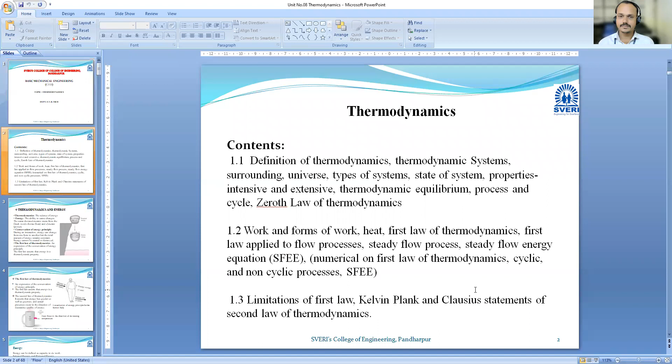This one is the syllabus, and that ability to change, to make some changes, means to run a vehicle, it needs to change energy from chemical energy - that is petrol, diesel - to mechanical energy, and that mechanical energy runs the vehicle.

So one more definition you have told, what is that? Capacity to do work, like that. Am I correct? Yes, sir, capacity to do work. So you can say to do some work, it requires some energy. Always, without energy, there should not be work.

Okay, so we are proceeding in that respect. So heat and work, these are very important phenomena, and many times students are more confused in that. So what is meant by heat? Mostly students are mainly confused, or they are considering heat and temperature both are same.

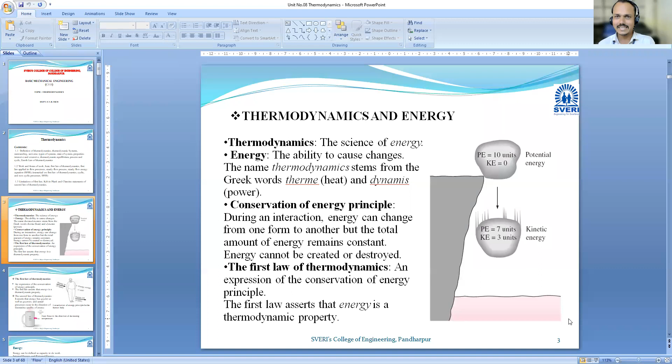Okay, so what is your opinion? At first I have told - yeah, Sally told that heat and temperature both are different. Okay, so we will see next whether they are different, whether they are same.

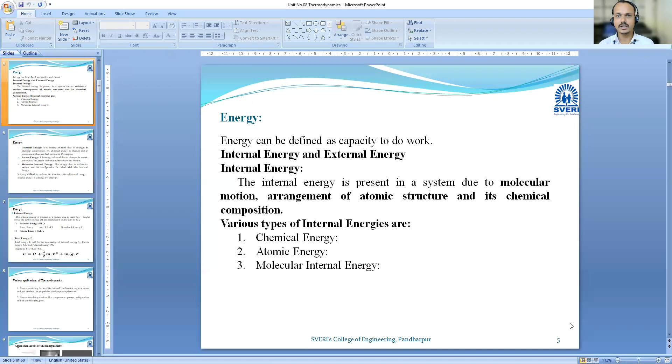Now we have seen there are two types of energies. First one is the internal energy. The internal energy is due to the molecular motion, arrangement of atomic structure, and its chemical composition. Okay, so this is the internal energy.

Now we are going to see external energy. Which are those external energies? Potential energy and kinetic energy. These external energies are mainly related to work. Do you get it? The external energies are mainly related to work.

Work - what is meant by work? Suppose this is the block, simple diagram, but ground is not straight, so I have to draw ground straight. Okay, on that if I put some block. So when I apply force here, that is F. Here we have mass M. So what will happen?

When I apply force, this block will be displaced in the direction of the force. That means work is done. Okay, that force is due to some energy.

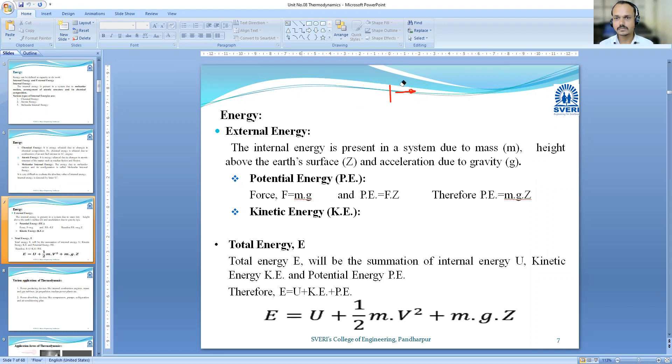So this external energy, that is potential energy and kinetic energy, are mainly related to work.

Then, various applications of thermodynamics. Thermodynamics is a very large area, covering a very large area. So these are some examples: internal combustion engines, steam and gas turbines, jet propulsion, nuclear power plants, etc. Power absorbing devices like compressors, pumps, refrigeration, and air conditioning plants. These are not the only examples.

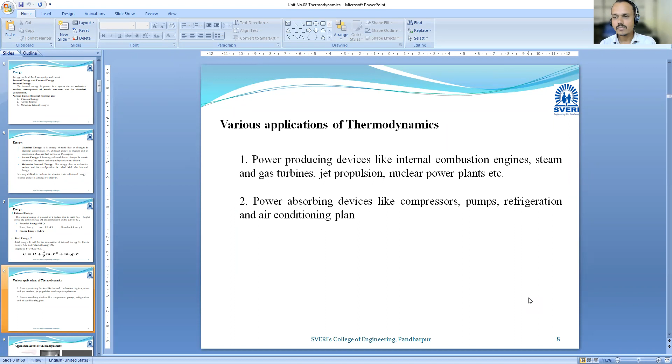Okay, if you are boiling water, this also comes under thermodynamics. If you are going to boil tea, making tea, then it also comes under thermodynamics. So thermodynamics is related to our day-to-day life. These are examples or applications of thermodynamics, but we can observe all these changes in our day-to-day life also.

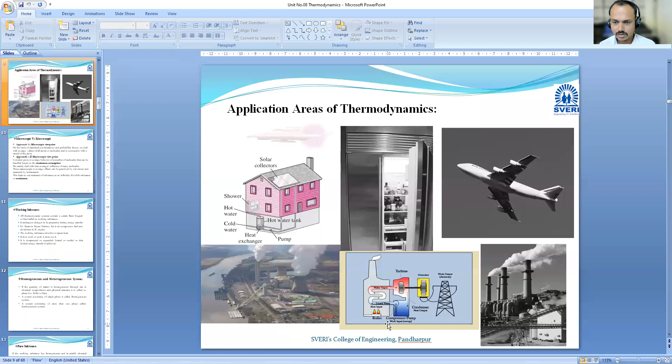Okay, so these are some images for these applications. Here, this is a solar power plant, hot water tank, then this is refrigeration, our fridge, this one is an aeroplane, these are industrial areas or nuclear power plants. Then again, this is also a compressor, and boilers are used in industry.

Now, microscopic versus macroscopic. There are two types of studies. One is microscopic and another one is macroscopic.

Actually, in the previous lecture, I have explained this related to temperature. Instead of reading that slide, I will explain it again.

Related to temperature, once again, suppose this pot is filled with water, and this water is at normal temperature. It means the molecules are having some vibration. If I consider one molecule here, I focus only on a single molecule from the water, and if I start to heat from normal water, and write readings, that means readings related to the behavior of that molecule.

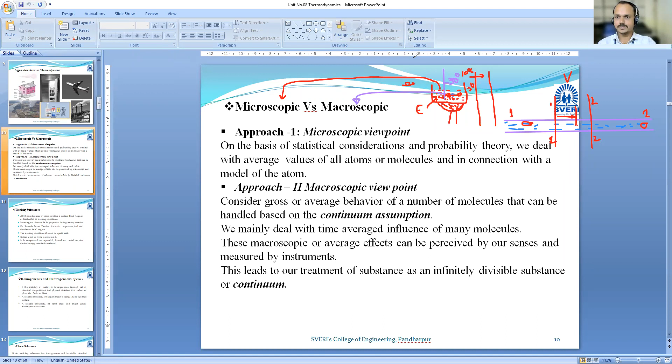Yes sir. Okay, so henceforth we are learning all these things under which approach? Macro. Macroscopic, yeah correct. Macroscopic approach. I think you understood all about microscopic and macroscopic approach. Now we will move towards the next slide.

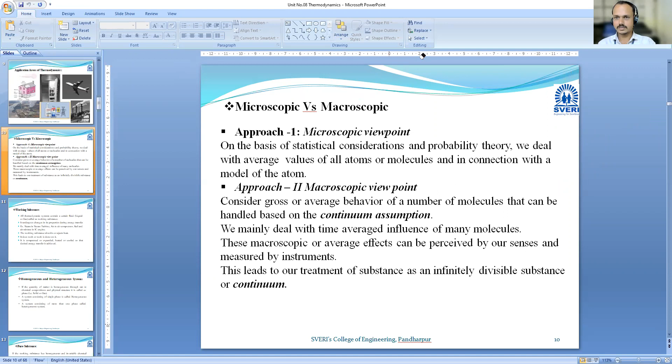Working substance. Now working substances are mainly fluids. It means working substances are the substances who are responsible for addition or subtraction of energy in the devices. So the working substances are mainly fluid. The fluid may be liquid or gas - this is the classification of fluid. You can't say fluid means we only consider.

Okay, our psychology says that - not psychology actually - we consider fluid means liquid. Am I right? Yes sir. And mostly we think about water only. Fluid means liquid, and that is water.

But fluid is divided into two parts, that is liquid as well as gases. In liquid, water is the standard liquid. For comparison, or to check the behavior of other liquids like diesel, petrol, oil - there are a number of liquids - to check that we require some standard, so for that we refer to water. And in gases, there are also a number of gases, and if we need to compare these gases with some standard, at that time we use air.

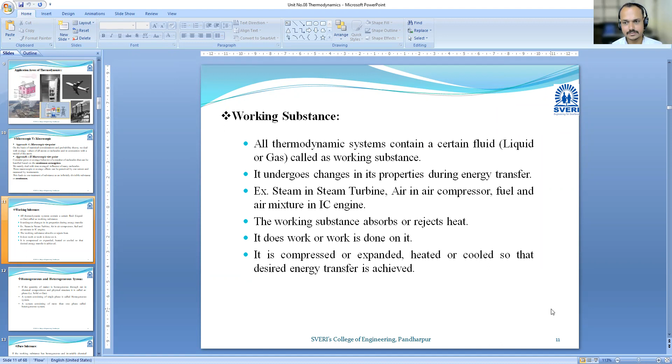Now, what is a homogeneous and what is a heterogeneous system? I think you have learned it, and I hope you can explain these points. So who will tell me?

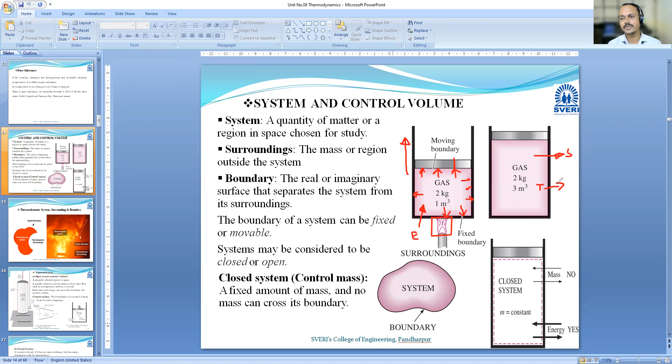Equilibrium condition, yeah correct. To achieve equilibrium condition, temperature or energy transfers from the system to the surrounding, because here we can say there is a potential difference, or temperature difference. Temperature is a property of the system. Temperature always flows from higher temperature towards the lower temperature.

So to achieve thermal equilibrium, the temperature will release into the environment, and as the temperature releases, it means it is in the form of energy. Due to that, this plate will move in the downward direction and take its original or previous position.

Okay, so did you understand these things? Today we learned homogeneous, heterogeneous, pure substance, system, surroundings, and boundary. Is anyone having any doubt in that? No, if nobody is talking, I consider there is no doubt.

Okay, with this we will stop here. In the next lecture we will see the types of systems and some examples on that.